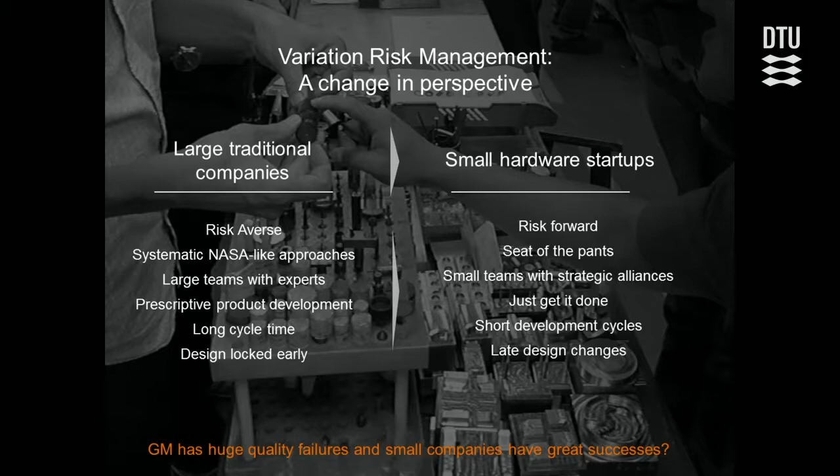So I've had a huge change of perspective. Since 2004, when the book came out, to now—I started my life in very large traditional companies that look a lot like a lot of the people in this room: very risk-averse, systematic, NASA-like approaches, large teams, people with incredible deep expertise, a lot of gray hair in the room, very prescriptive product development with stage gates, etc., long cycle time, your design is locked early, and you have the resources to do those iterations.

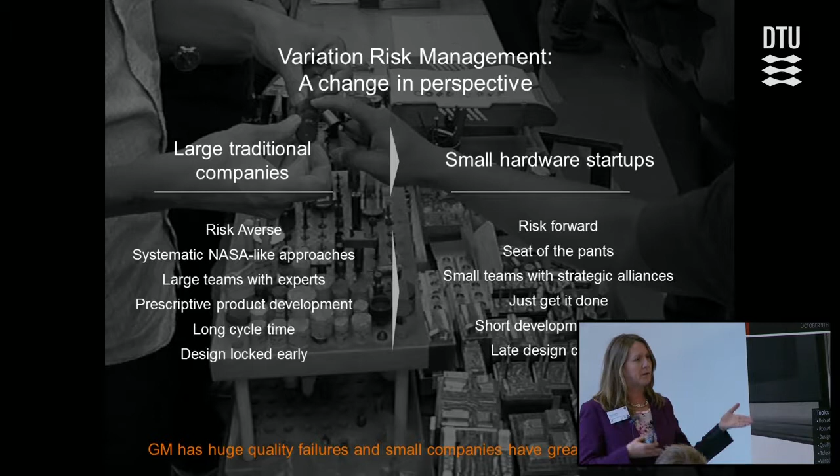I'm now in the small hardware startup space where people are risk-forward, it's seat of the pants, everybody's getting stuff done quickly, just get it done. There's a lot of late design changes in product development, a lot of build, test, build, test, build, test. And the academic in me—it made my head explode until I realized I was reading all these articles about Toyota and GM having massive quality failures, even with all these great people doing robust design. Yet I've got these small startup companies who aren't doing things the way they're supposed to, but they're having these highly successful, beautiful products. Somehow they're doing it, but not in the way we teach it. It's been a really interesting puzzle—the academic in me has been having an absolute blast trying to figure that out.

So, bikes—if you guys talk to me for more than 15 minutes, I always talk bikes. I'm a big cyclist.

So it was really interesting sort of looking from the time that I wrote the book to now. The left was the Tour de France bike that happened when I started this whole path, and the one on the right is one that was ridden recently.

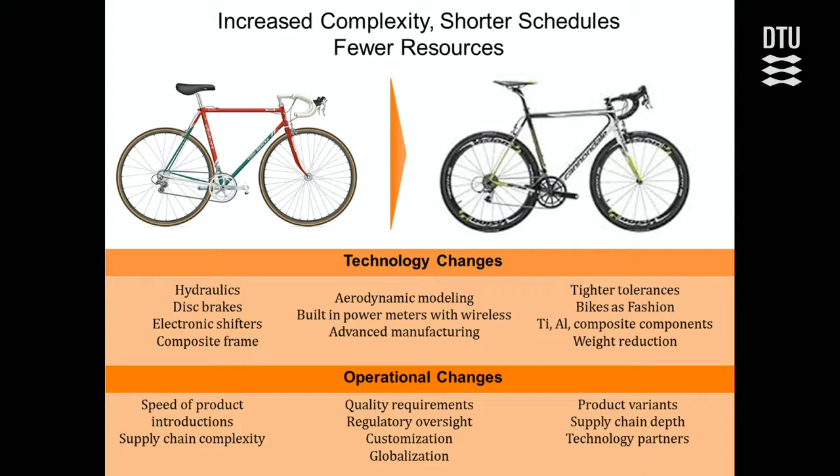And what's happening in industry in general is that there's been huge technology change. Just the sheer volume of technologies, materials, the integration has grown incredibly. In addition, the operational changes have changed considerably in terms of speed to market, your regulatory, how many product variants you're doing. But the interesting thing is this is happening with much shorter schedules and with a lot fewer resources. So you're having to do this incredible complexity without the luxury of time and people to be able to get it right.

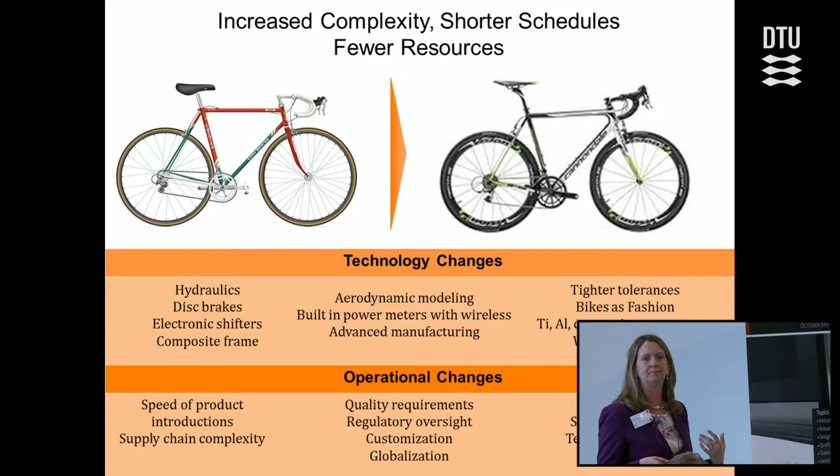So how many of you guys heard about the hardware revolution, if you read about it? Yep. So the hardware revolution is something that I really wasn't aware of until I started working in startups. It came out of the maker movement, and there's this huge change that's been happening, probably the inflection point was about 2013, where new technologies such as rapid prototyping, Arduino, online CAD, infrastructure tools, all those things that as a large company we spend hundreds of thousands of dollars on, you can now get the simple version of them online for free.

And so the barriers to entry for these hardware companies have gone to zero. What used to take years to develop, you used to have an SMT line, you had to have access to injection molding, all these things, these new hardware startup companies can just get them online now. So the barriers to entering are incredibly low. Now, it may look like it's just little tiny electronics, like your Pebble watch, something that plugs into the back of your phone or into your car.

But I was actually meeting with some hardware startups over at the Founders House, and there's a group that's actually doing an electric motorcycle. They figured out the supply chain, and they want to be the next Ducati for electric bikes. And it's 10 guys in an office. So these barriers to change are coming down. So really anybody can develop a product. So why is this important?

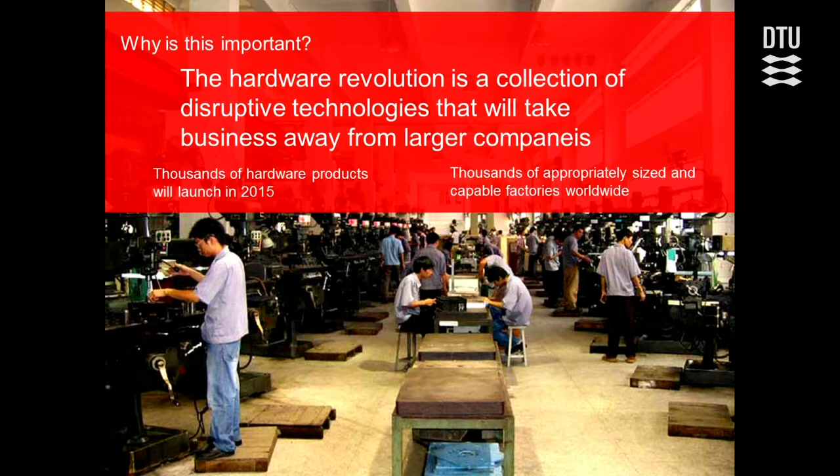How many of you guys read Clay Christensen's book on Innovator's Dilemma? If you haven't, go read it. It's really important. He's got this idea of disruptive technology, where technologies happen sort of in the margins, they get developed in different spaces, and then they come and they eat your lunch. So it's sort of the laptop to what IBM used to be. Another example they use is cables to hydraulics in heavy equipment.

There are these technologies that grow up, and I really have come to the conclusion that there are a whole range of technologies around product development that are in and of themselves disruptive technologies, growing and developing these small industries, but eventually these small companies and their ability to be incredibly nimble and fast will end up starting to eat away at the business of some of these larger companies that have a lot of overhead, a lot of infrastructure.

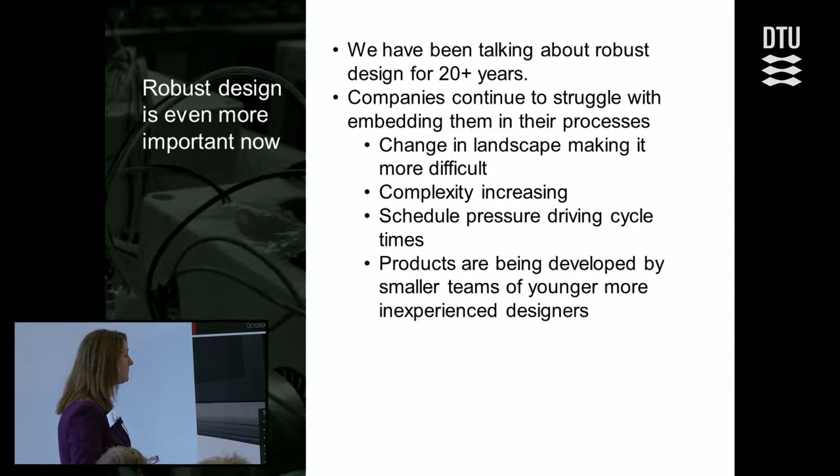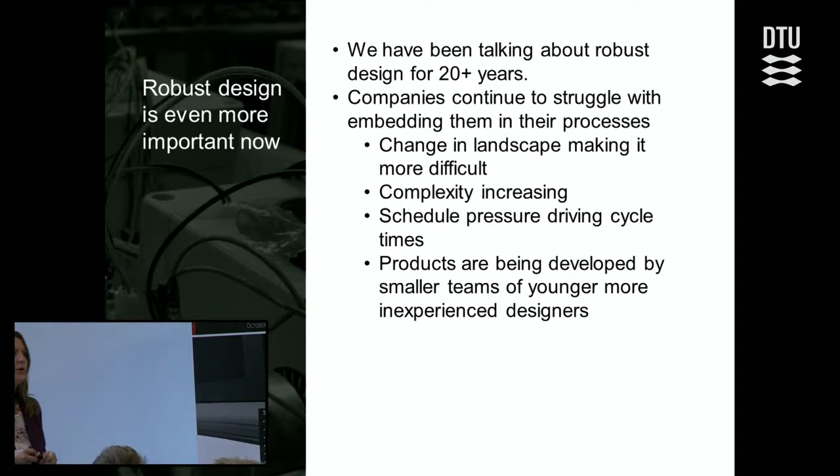So why is that important to Robust Design Day? Well, for these companies, robust design becomes even more important. And this is one of my agendas that I didn't bring up with my CEO. He doesn't know it. You guys know it. I want to brainwash all of these young engineers to figure out how to do this in these small startups without the advantage of having the 30 years of experience.

So we've been talking about robust design for 20 years, and companies still struggle with it. I always joke that I have infinite employment. I will be able to pay for my child's college education. My grandfather worked for International Harvester, and he wrote articles about this 30 years ago. At first I was very depressed, and then I realized that I always have an income.

We've been talking about this for so long, but we are working in a space that's getting more and more complicated, more and more pressure. The complexity is increasing. And most importantly, and I think everybody who's talked so far has talked about this, products are being developed by much younger engineers who don't have that experience, who don't have that knowledge. This product is being developed by people who do not understand the word robust, don't understand what variation is, don't have that training, and aren't getting it.

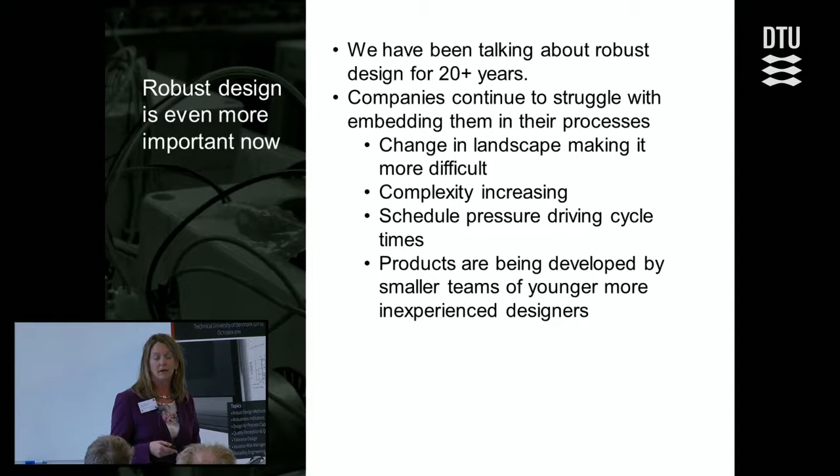So the question is, how do we do that? How do we give them that capability? The problem is that with this growing complexity, it's not possible to look at all the interactions and all the possible sources of variation. You just can't do it. You can't create that KC flow down for the whole product. We were having a talk today about this with the wind turbines.

There's just not enough hours in the schedule. There are not enough people. And so the trick becomes not so much how to do the robust design, but where to do the robust design, and how do you begin to downsize that. And I think the best engineers in this room know how to do that intuitively.

Like, we know after tons of years to be able to look at a product and go, I don't know why, but I know that's the problem. I mean, I'm sure you've got that experience as well. You can just look at it and you just kind of get this sinking feeling in your stomach when you look at parts of a drawing. So how do you begin to look at that?

So the question then becomes, how do we, and I wanted to retitle this, right-sizing variation risk management. I wanted to call it Perfection is the Enemy of Completion, as sort of the subtitle. So we were all trained in this world. That's the basis of all of our education. Our education came out of the Sputnik NASA era. That's the way we were trained. When I learned risk management, you went through and analyzed everything. It was based on the space systems. You had this idea of model everything, test every source of variation, and everything is evaluated.

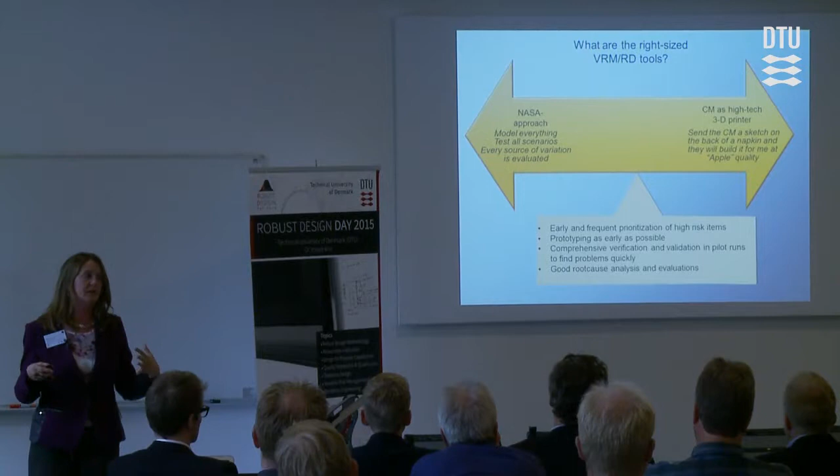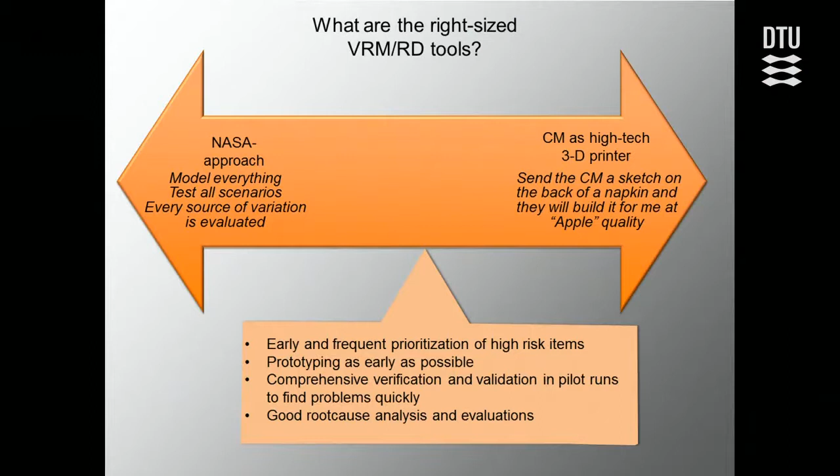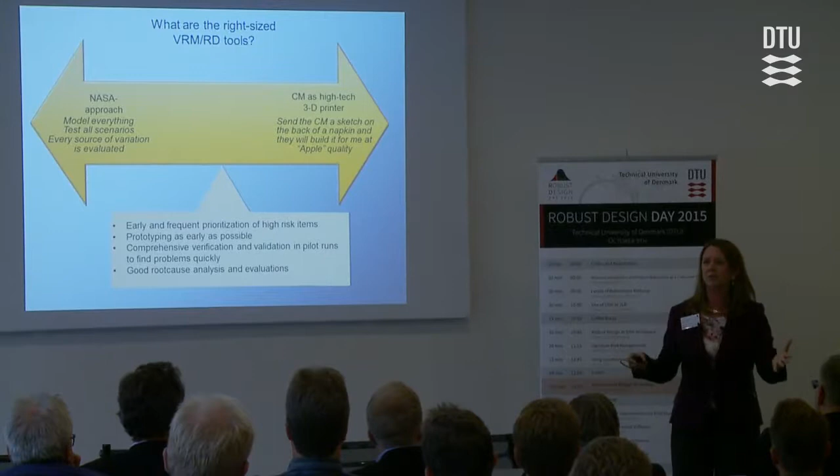Now, the kids that come to see me, who are all 12, see their contract manufacturer as a high-tech 3D printer. They think they can literally put a sketch on a piece of paper, kind of go, this is sort of what I want, and here's a video. And somehow a magic button gets pressed, and 1 month later they get this beautiful product that is of an Apple quality. So that's not feasible anymore. That's not realistic.

So where is that? So the trick is what is that right size? So where do we sit in this? And what are those key aspects that we want to keep? And what do we want to not necessarily ignore, but what can we postpone, or what's going to be in the biggest focus? So if you look at the way some of these software tools are coming about that are supporting the hardware evolution, or all these techniques that are supporting the hardware evolution, they have two aspects to them.

One is they strip away everything. Sort of the difference between Word and Google Docs. Google Docs gives you 90% of what you need with about 10% of the features. And the other thing that the tools do is what's called progressive disclosure. And what that is, is that instead of saying to somebody, you need to do robust design, and they go, I have no idea what that is, and I don't have time, it becomes a series of progressive disclosure, which is, I'm going to ask you a question you can answer.

How many of you have ever done taxes in the United States? No. Okay, how many of you have ever heard of a program called TurboTax? Okay, so one person. So this works much better stateside. So U.S. taxes, we won't get into U.S. politics. I could rant forever.

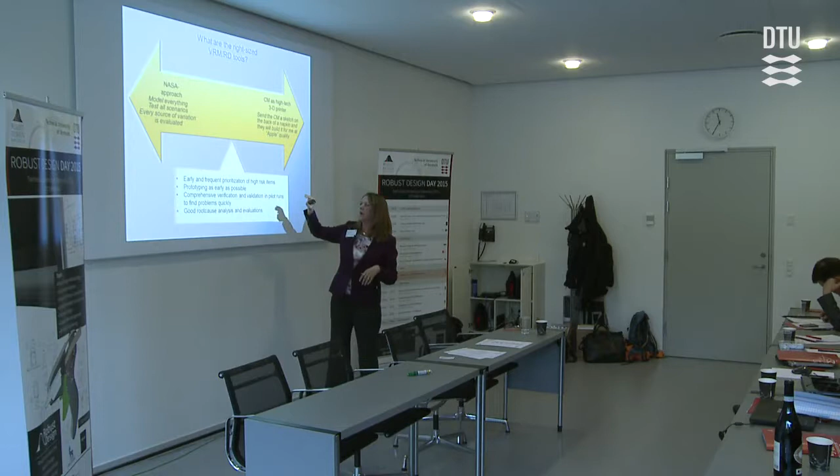So, you know, what are those tools? And this is something that I'm figuring out right now, and anything you guys can do. I think this is going to be the future of it. It's not going to be this perfect, detailed Taguchi model, but it's going to be what gets you there easily. So the key items are, how do we do early and frequent prioritization of high-risk items? How do we prototype? And prototyping can be physical or it can be computational.

So what do we do? I'm kind of flying by the seat of the pants at this point, and I have only a set of tools that I can use. I can't bring robust design in. They can't imagine it. The schedule is going too fast. So I joke that it's sort of like when I had to get my kids to eat broccoli, I had to bury it in cheese. So I have to bury robust design under a lot of cheese to get them to eat it. So this is the way I bury robust design. I bury the vegetables in their dinner.

So the first one is around warranty analysis. Actually, I'm going to go back, and I'm only going to touch on a couple of these. So the first is around warranty analysis. And I'm going to talk a little bit about how this can be large companies and small companies. We do a huge amount of DFM and DFA. We don't make them do that. We've got amazing DFM people, and we just do it.

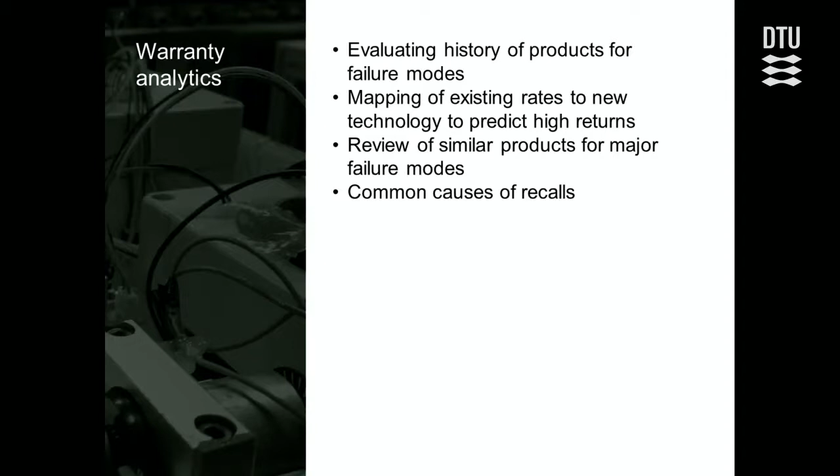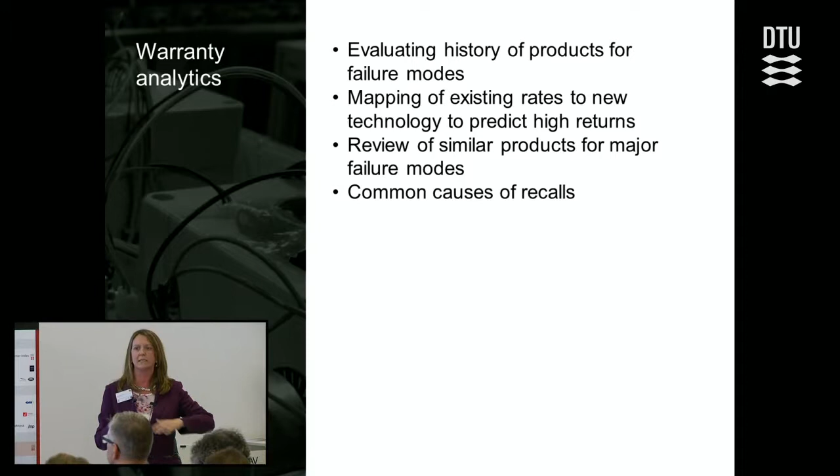Quality planning, this is my cheese on the broccoli. And then we have amazing project managers in China that just do an incredible job, and we just can't replace those. So warranty analysis, analytics. It's very hard from the ground up to say how can everything fail. We just start with how has it failed. And what I tell my customers to do is go to Amazon, find all of your competitive products, and read every single one-star review.

Yeah, it gets you pretty close on what's going to be a problem. What do people complain about? What do they not complain about?

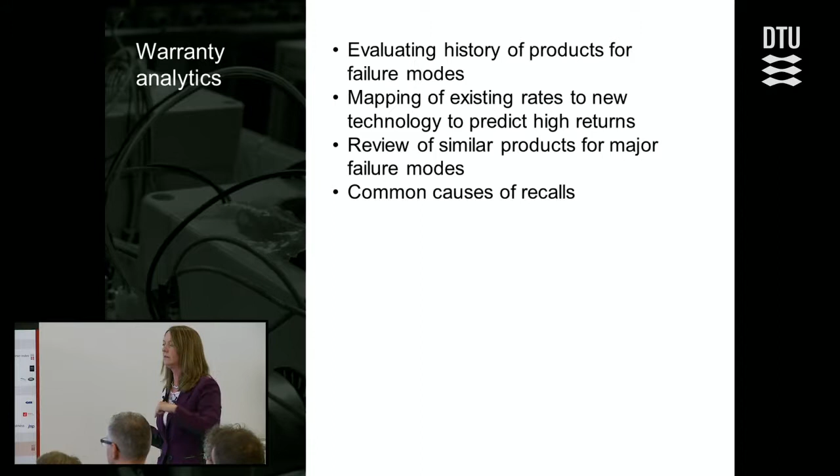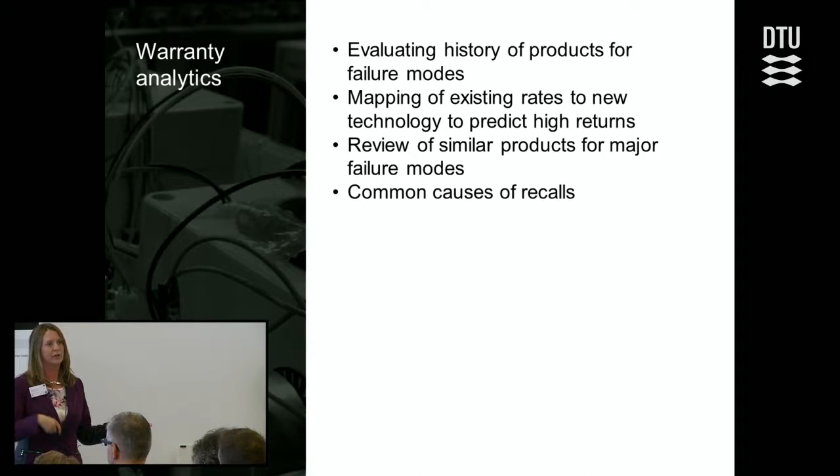We also, as part of my second career, did a ton on warranty analytics and how to use warranty analytics to do predictive models for the future. So how do you take historical data and look at how your new product is going to be, and then basically scale your warranty analytics to say whether it's going to go up or down based on increase or decrease in robustness. There's not enough time today to talk about that.

And then the other one is common causes of recalls. I asked them to go read the CPSC databases to see how other products have been recalled.

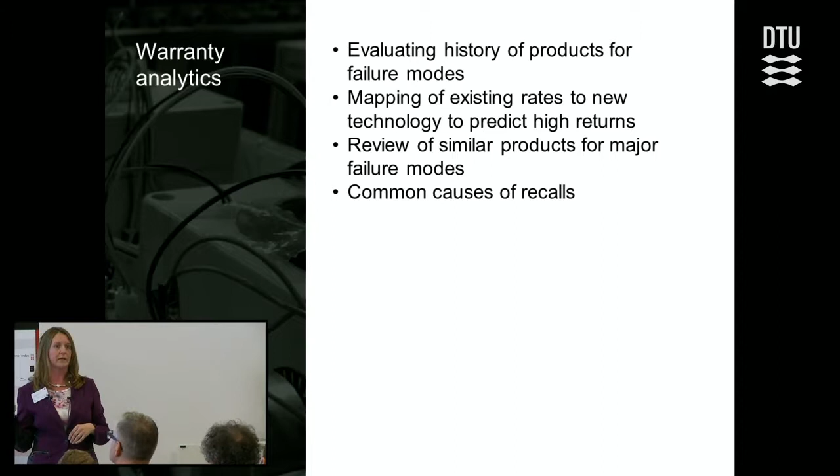Warranty analytics, if anybody wants to talk about this, I can talk blue in the face on this. This is what I spent a lot of my last 15 years on. These are different industries I've worked in. Depending on the type of industry, you have to be very specific about how you analyze the data. And there's no one software program that I think is available for warranty analytics because it does have to be so industry specific.

So the pre-mortem. This is a technique I developed when a number of my companies kept having the same failure and the same causes over and over again, and it was great - it paid my mortgage for about 6 months. But I don't want to do that on the back of quality problems. I'd rather prevent them.

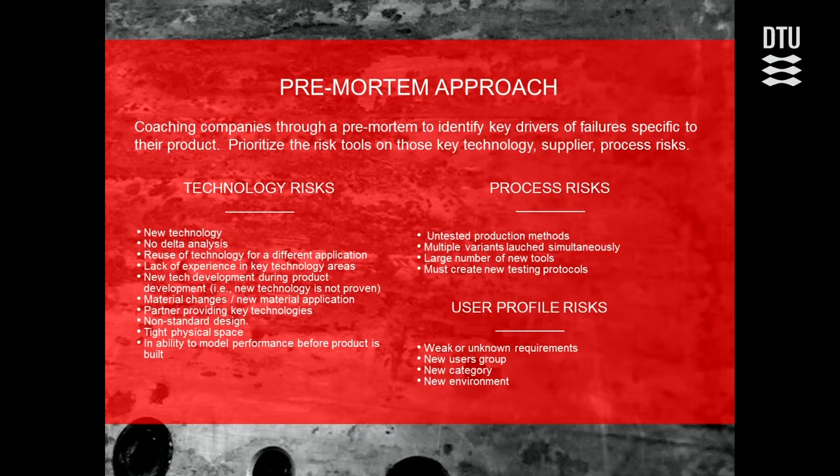So what we did was we went through a whole bunch of these cases and figured out what were those root causes - what were those things that were causing people to have defects, or making products that were not robust? And they were things like new user groups - a new set of users, a new set of customers, same product, different application, and they really didn't understand that. Or the tight physical space.

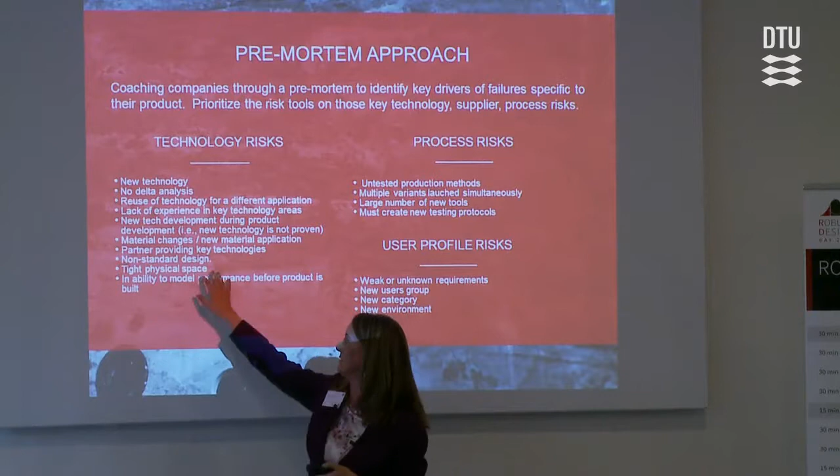I call it the 10 kilograms of potatoes in a 5 kilogram sack - that tight physical space. So they take a product and they're trying to mash it into a much smaller space. That creates a whole bunch of problems.

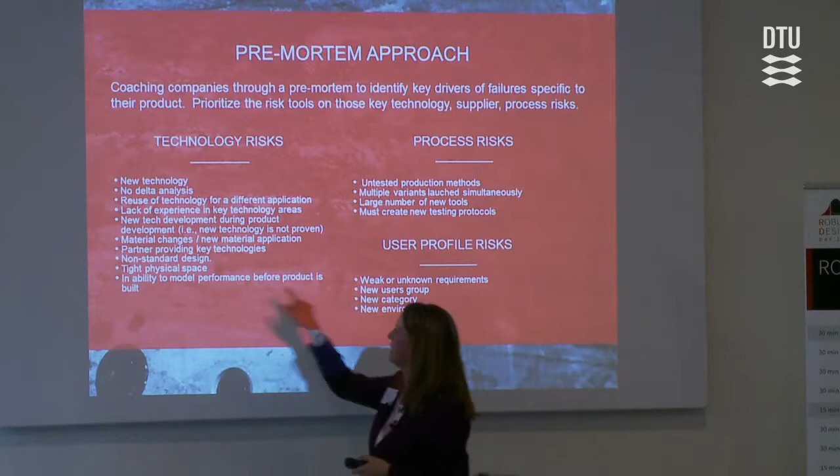New technology, not having a good delta analysis. So what we found is that in a lot of the companies I worked in, every different product would be a unique combination of these, but the superset was always the same.

And in fact, one of my prior clients now goes through this and does a checklist. And if it has more than 5 checks, they have a design review to see whether or not the product should be postponed until they reduce the risks and get more data. So it's a way of stopping products before it comes in.

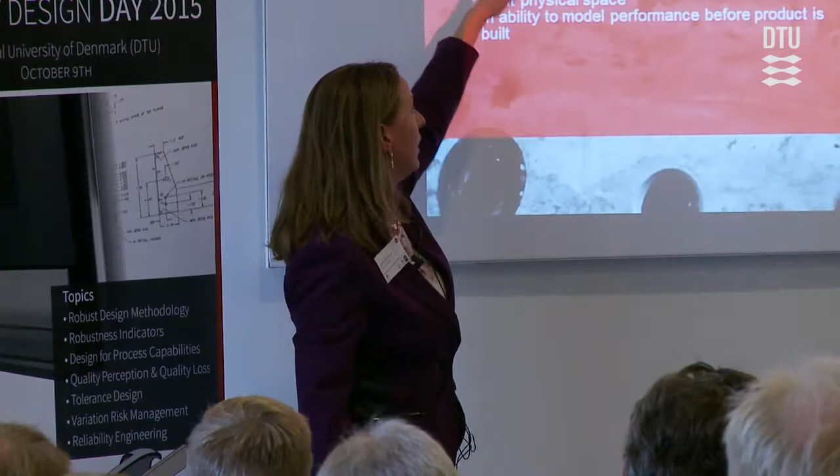But more importantly, it really gets the teams to think about and highlight what is it about this that's going to drive the robustness of the product, and what do we really need to investigate and understand in each of those areas. So instead of having a long list of 40 things they have to do, they highlight those 5 critical ones that they know have caused them problems in the past.

So the quality planning, this is the broccoli. Oftentimes now with these startup companies, the quality plan is the first time they actually have to write something down. You know, it's all in the cloud, and it's all in 3D and all in Box - they don't have PLM systems, they have Dropbox. And this is really the first time they have to actually write numbers down about their product. They haven't had to write them down before.

And so what we're doing is we're trying to get them to think about their quality plan earlier and earlier. They know they have to have a quality plan, and they know they need to do it early, and so it gives us the opportunity to start asking those questions around robustness.

So what do your steps and gaps need to look like? What do your surfaces need to look like - is this an Apple quality product? Is this a Kindle quality product? Is this electronics-in-a-box quality product? Do you have to see it, what's the look and feel? And then we help them begin to translate that into actual quantified requirements. But again, that's sort of a progressive disclosure of asking them questions around the quality plan.

So we sort of hit them on the life testing.

You know, what does the durability of this need to look like? That starts getting them to have that conversation about how often is this going to be hit. Is it going to be dropped? Is it going to be loaded? How many times is somebody going to be doing this? Are there parts that are going to get dirty? Are there parts that are going to wear? We use that as having the conversation. I would get nowhere if I said, you need to write down your requirements. They're not going to do it. So we come at it from a very different direction.

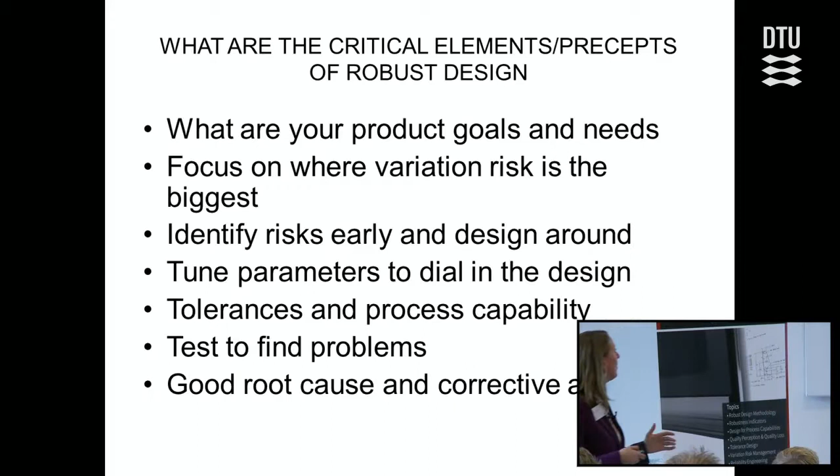So what are those critical elements and precepts of robust design that should be in this? Let's ask that question. These are the things I have to get at, but I'm finding I'm having to come at it from different directions than I'm used to, because there isn't somebody in the company that speaks my language.

What are the product goals and needs? Where is the variation risk the biggest? These are the big questions. We can't deal with all of it, so what are those 4 to 5? Identifying those risks early and getting them to design around it.

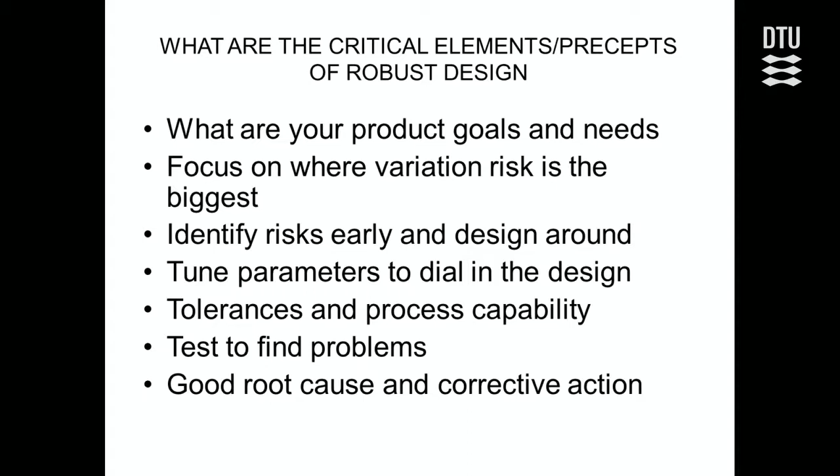So right now I've got one where the ID designer wants a mold finish where it's like a flat piece that comes in at a back angle, and we're really concerned about that flash. We know that flash is going to be a big issue, and then the alignment of the piece is going to be a big issue. We know the steps and gaps are going to be a big issue. So we're bringing that up right now within the context of the aesthetic quality requirements.

Tuning the parameters to dial in the design, that's another good example. Getting them to think about tolerances and process capability. I'm amazed at how many drawings go into production with no tolerances on them. For the academics in the room, teaching tolerances is really good. And also, testing to find problems.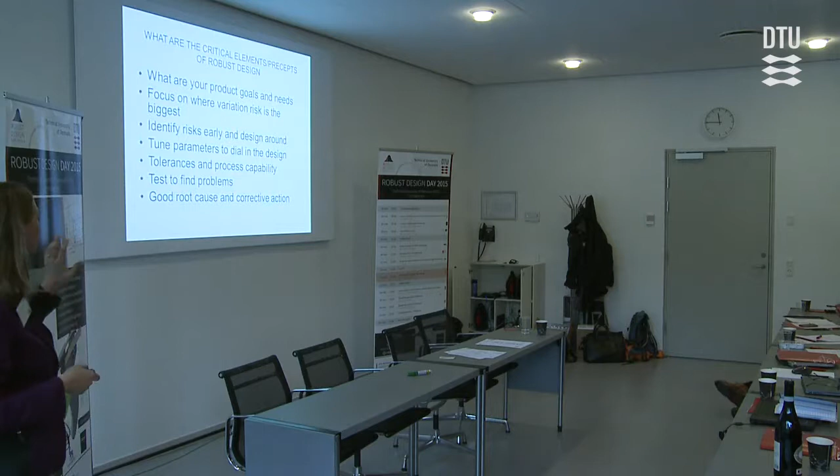In a lot of cases, because the barriers to entry for getting that first prototype out and getting that production intent prototype out has become so much smaller, it's feasible to do that build, test, but testing with production intent.

And then finally, the good root cause and corrective action. So I would ask you guys to think about: in 5 years, is there something in this variation risk management world or the robust design world that's going to be the equivalent of SketchUp? I don't know if you guys have used that—it's the online CAD tool, or Google Docs, or ProtoMold.

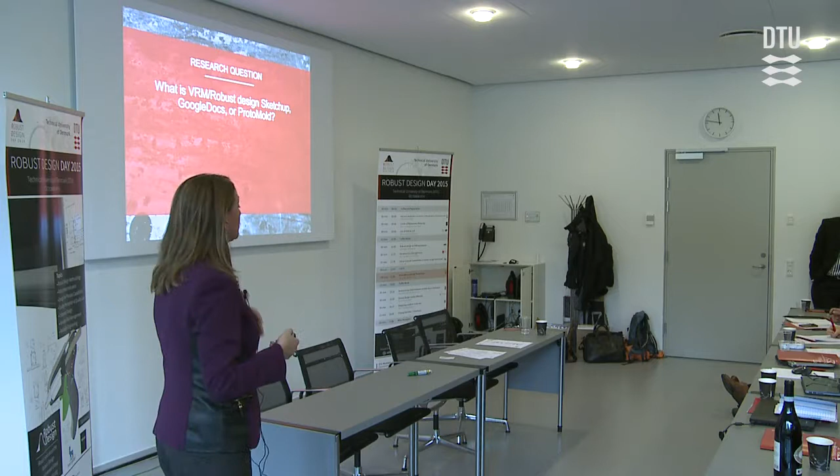So what of this huge body of knowledge that we all have in incredible detail, what are those critical few, and how do we get our engineers to eat the broccoli and do this in a way that allows them to be successful, but in a way that does not require them to learn massive software programs, does not require them to have incredible courses, but allows them to almost intuitively do what is the right thing for their product. So, any questions? Thank you very much, Anne.

Any questions? Okay, well, I'll kick off if you don't mind.

So one of our robust design graduates, the guy who produced these book readers, he's an extremely good engineer. He produced his description for this, put all his GD&T tolerances on it, and sent it out to Asia for production. And it came back, and we got some measurement reports done on it. There was the same tolerance on every single dimension, regardless of whether he toleranced it tighter or not.

And because he was a startup, there was basically nothing he could do about it. You've got the product, you've got a launch, you haven't got a legal team to go and fight your corner on these tolerances that you've asked for, they've agreed on but not delivered. I'm just wondering, are these some of the issues that startups face, and is there anything we can do about those concerns? The fact is, you have to design to the process capability of the company you're working with. Depending on how you choose your injection molding supplier, that can have a big effect on it.